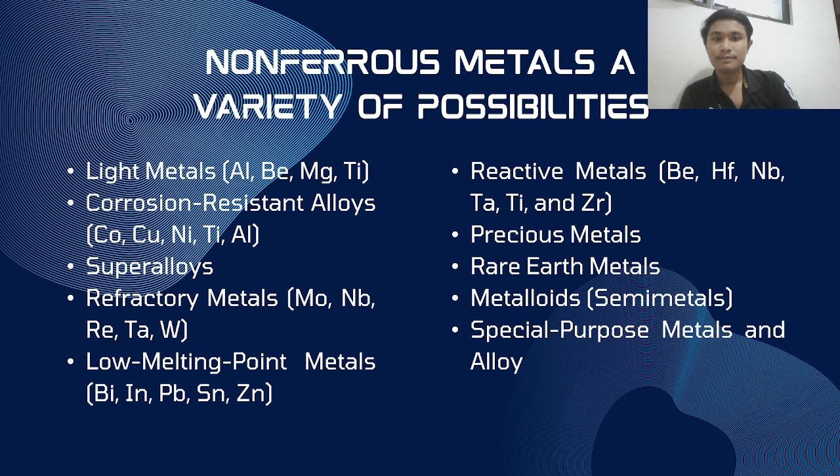So today I would like to present my presentation about non-ferrous metals, a variety of possibilities. Okay, this is the main report. Okay, this is the topic we will discuss in this presentation. Non-ferrous metals, a variety of possibilities.

Compared with their steel counterparts, non-ferrous metals and alloys are notable in their number and in the diversity of their properties. Many non-ferrous elements do double duty as important alloying agents for both steels and non-ferrous metals. The latter approach was chosen in this chapter, where several non-ferrous metals are grouped into the following key alloy categories.

At first, light metals: aluminum, beryllium, magnesium, and titanium. Corrosion-resistant alloys: cobalt, copper, nickel, titanium, aluminum. Superalloys: nickel, cobalt, iron-nickel. Refractory metals: molybdenum, niobium, rhenium, tantalum, and tungsten. Low melting point metals: bismuth, indium, lead, tin, and zinc. Reactive metals, precious metals, rare earth metals, semi-metals, also known as metalloids.

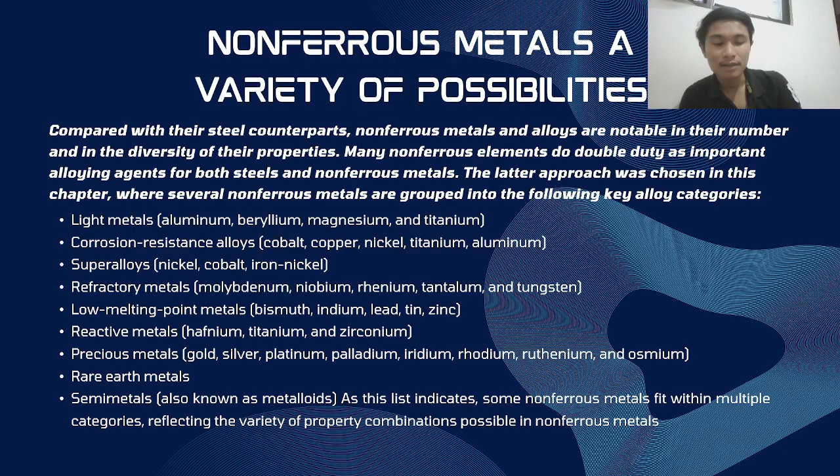As this list indicates, some non-ferrous metals fit within multiple categories, reflecting the variety of property combinations possible in non-ferrous metals. Okay, next, light metals. High-strength, lightweight alloys are of great importance in engineering applications for use in land, sea, air, and space transportation. 1 kilogram of metal saved in the design and construction of such a system can result in important weight savings in power plants, transmission systems, and in total fuel requirements.

Next, aluminium. As a light metal, aluminium has a density of only 2.7 grams, resulting in a weight that is approximately one-third of the same volume of steel, copper, or brass. Beryllium is a high-strength, lightweight metal that is finding increasing use as a structural material in aerospace vehicles.

Next, magnesium has long been recognized as the lightest structural metal. Next, titanium is another low density element, 60% of the density of steel, that can be readily strengthened by alloying and deformation processes.

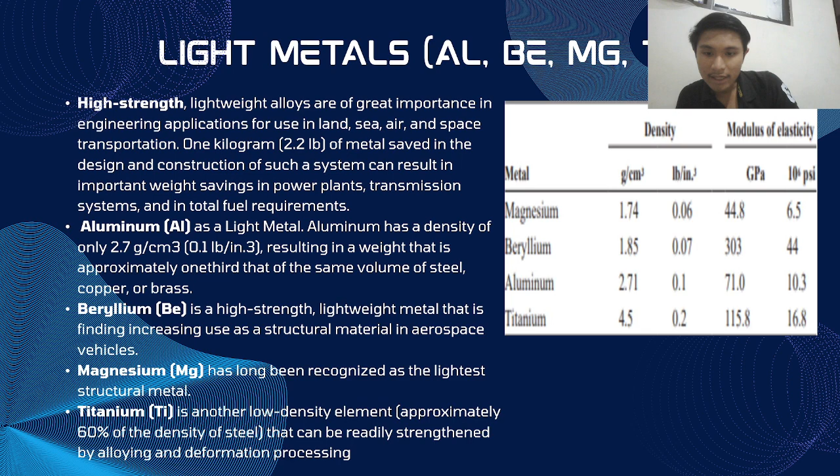Okay, next, corrosion resistant alloys. Non-ferrous metals and alloys are widely used in corrosive environments. At one end of the spectrum, they are used for water piping and food preparation.

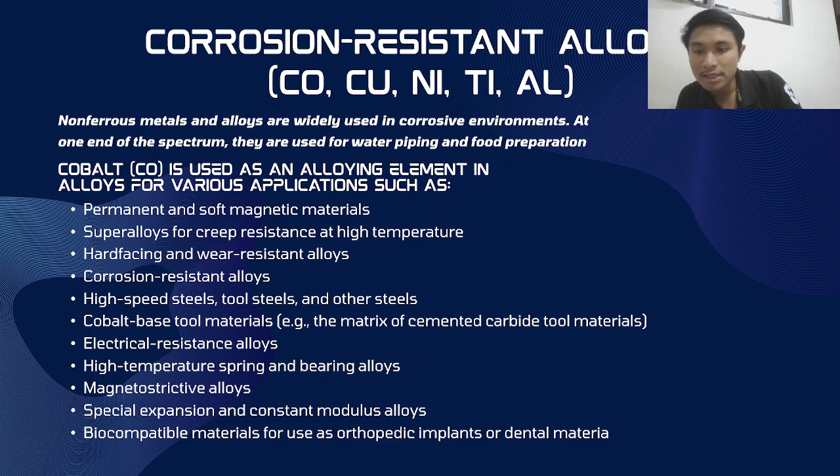Cobalt, Co, is used as an alloying element in alloys for various applications such as permanent and soft magnetic materials, superalloys for creep resistance at high temperature, hardfacing and wear resistant alloys, corrosion resistant alloys, high speed steels, tool steels and other steels, cobalt based tool materials, electrical resistance alloys, high temperature spring and bearing alloys, magnetostrictive alloys, special expansion and constant modulus alloys.

Next, copper, Cu, and copper-tin alloys, bronze, have had important applications since antiquity. Copper is a noble metal, but unlike gold and other precious metals, can be attacked by common reagents and environments. Another passive state can be obtained when the metal potential is shifted to more positive values, forming copper oxide, as seen on the Pourbaix diagrams of copper in water.

Next, nickel. Alloys are very important to industries that deal with aggressive chemicals and high temperature conditions. Many of the nickel alloys designed to resist aqueous corrosion processes have higher resistance to hydrochloric acid and chloride-induced phenomena than the stainless steels. Next, titanium and its alloys are part of a larger family of materials known as the reactive metals.

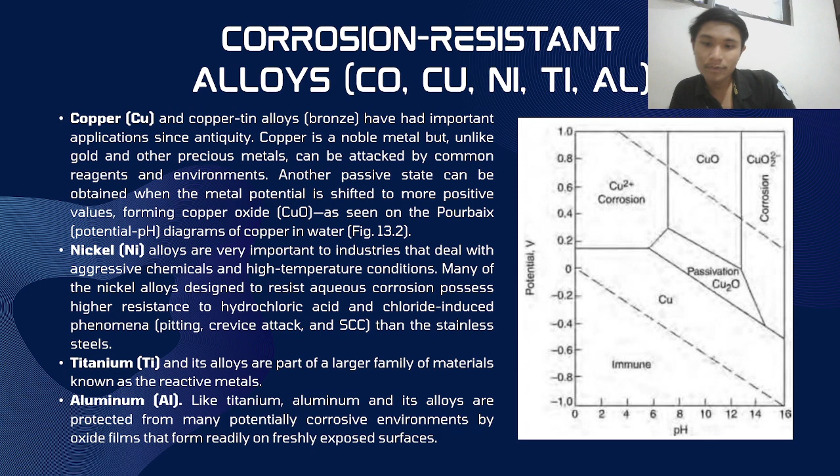Next, aluminum. Like titanium, aluminum and its alloys are protected from many potentially corrosive environments by oxide films that form readily on freshly exposed surfaces.

Next, superalloys. Superalloys are a group of nickel-based, cobalt-based, and iron-nickel-based alloys that exhibit outstanding strength and surface stability at temperatures up to 85% of their melting points. Nickel superalloys. Nickel-based superalloys currently constitute over 50% of the weight of advanced aircraft engines. Turbine disc components are a major application.

Powder metallurgy processing of superalloys has proved to be a very repeatable and cost-effective method of production. Next, cobalt superalloys. Virtually all cobalt-based superalloys are alloyed with nickel in order to stabilize the FCC structure between room temperature and the solidus temperature of the alloy.

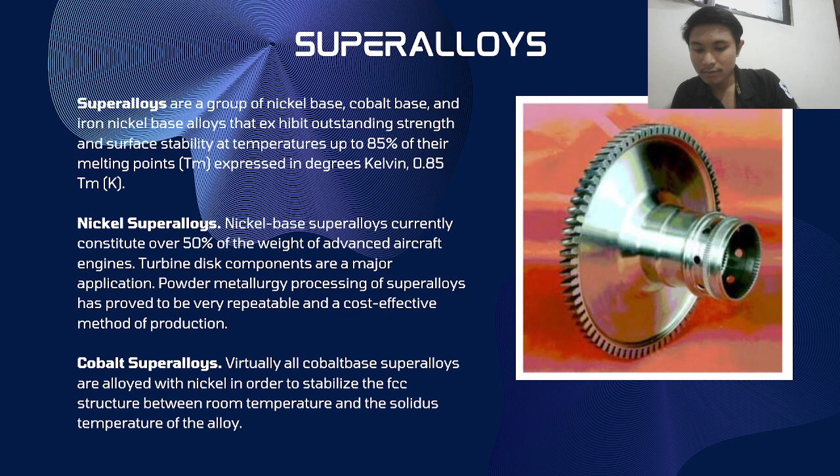Okay, next, refractory metals. This family has five.

This family has five members: niobium, also referred to as columbium, tantalum, molybdenum, tungsten, and rhenium. With the exception of two platinum group metals, osmium and iridium, refractory metals have the highest melting temperature of all metals.

Molybdenum has a relatively high melting temperature, along with a high modulus, good creep strength, and the retention of mechanical properties at high temperature. Next, niobium. In addition to its high melting point, niobium is used for its combination of relatively light weight and retention of high strength at service temperatures.

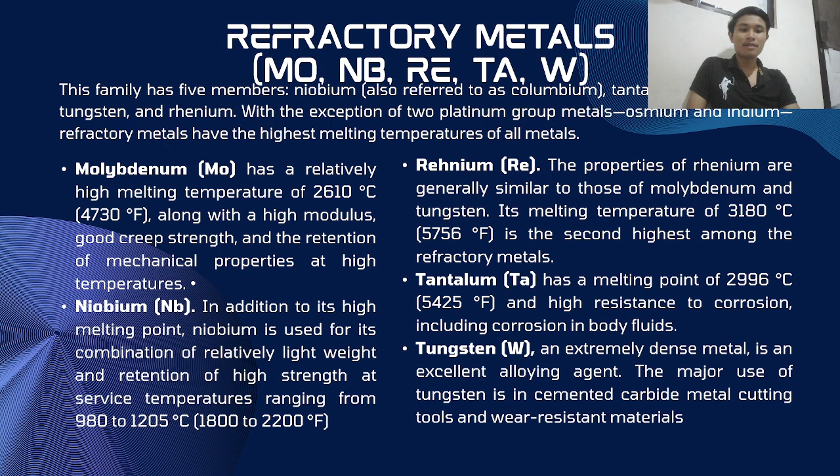Low melting point metals: Bi, In, Pb, Sn, and Zn. Bismuth is brittle, easy to cast, and not readily formed by standard working methods. Its melting point is lower than that of tin-lead solder. Indium is one of the softer metals, easily scratched, and highly plastic. It can be deformed in compression almost without limit. It has low tensile strength and hardness, and is stable in dry air at room temperature.

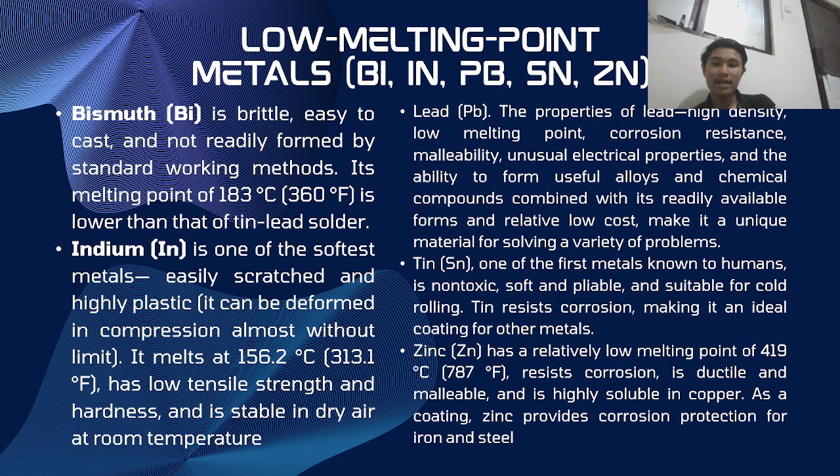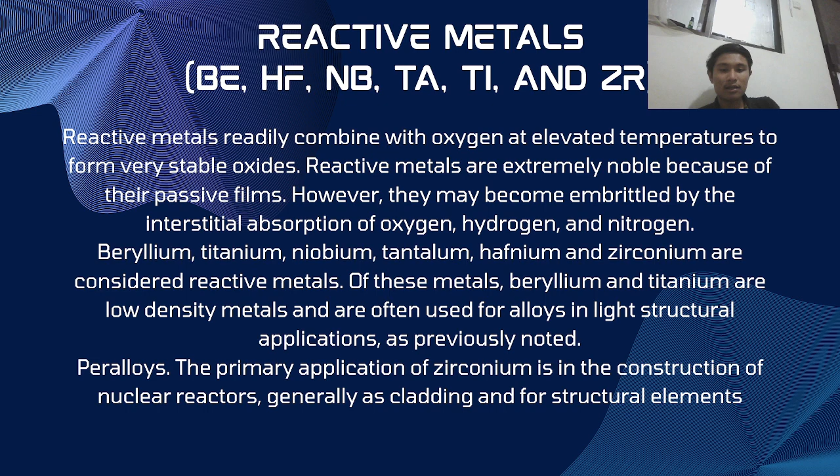Next, reactive metals. Reactive metals readily combine with oxygen at elevated temperature to form very stable oxides. Reactive metals are extremely noble because of their passive films. However, they may become embrittled by the interstitial absorption of oxygen, hydrogen, and nitrogen. Beryllium, titanium, niobium, tantalum, hafnium, and zirconium are considered reactive metals. Of these metals, beryllium and titanium are low density metals and are often used for alloys in structural applications, as previously noted. The primary application of zirconium is in the construction of nuclear reactors, generally as cladding and for structural elements.

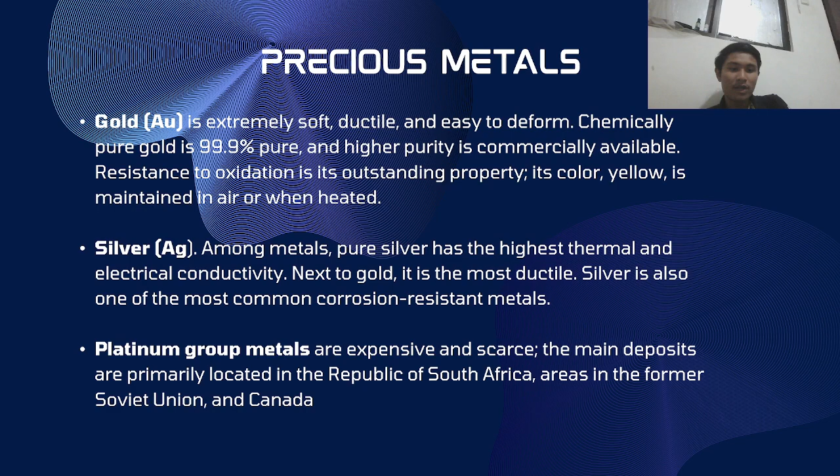Next, precious metals. Gold is extremely soft, ductile, and easy to deform. Chemically pure gold is 99.9% pure, and higher purity is commercially available. Resistance to oxidation is its outstanding property. Its yellow color is maintained in air or when heated. Silver. Among metals, pure silver has the highest thermal and electrical conductivity. Next to gold, it is the most ductile. Silver is also one of the most common corrosion-resistant metals. Platinum group metals are expensive and scarce. The main deposits are located in the Republic of South Africa, areas in the former Soviet Union, and Canada.

Next, rare earth metals. The term rare earth is deceptive; rare earths are not necessarily rare. The name derives from the oxide minerals in which they were discovered. The family has these members: scandium, praseodymium, promethium, europium, terbium, holmium, thulium, lutetium. Representative properties: some rare earths can be fabricated cold. All are poor conductors of electricity and are paramagnetic. Next, representative uses. Rare earth metals are used in carbons for arc lighting. Misch metal iron alloys serve as flints for lighters. Glass is polished with cerium oxide.

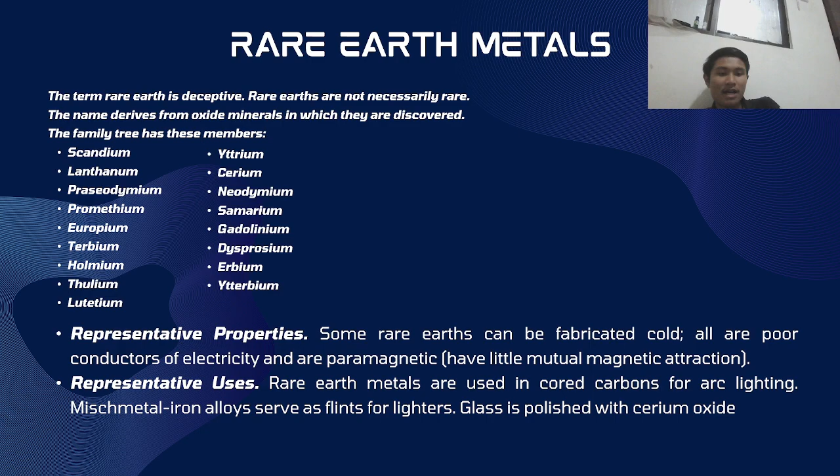Special purpose metals and alloys. Uranium is a moderately strong and ductile metal that can be cast, formed, and welded by a variety of standard methods. It is used in non-nuclear applications primarily because of its high density. Vanadium. Vanadium is chemically active and closely related to niobium, tantalum, titanium, and chromium. Vanadium is soft, ductile, and strong.

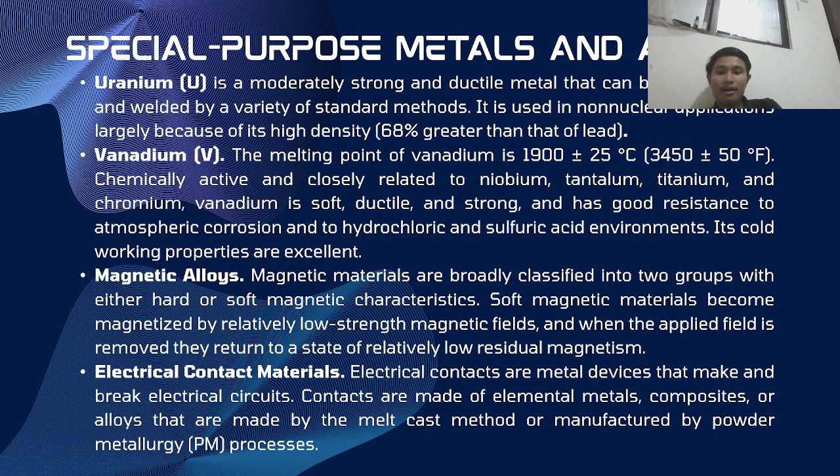Next, magnetic alloys. Magnetic materials are broadly classified into two groups with either hard or soft magnetic characteristics. Soft magnetic materials become magnetized by relatively low strength magnetic fields, and when the applied field is removed, they return to a state of relatively low residual magnetism. Next, electrical contact materials. Electrical contact materials are devices that make and break electrical circuits. Contacts are made of elemental metals, composites, or alloys made by the melt cast method or by the powder metallurgy (PM) process.